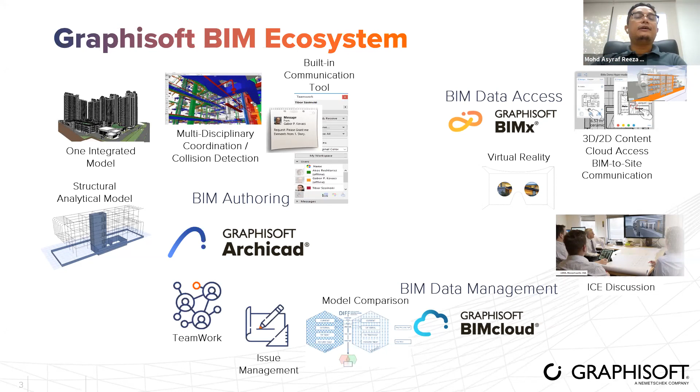And another one is BIMcloud, our digital platform that facilitates BIM data flow among our system. I will talk specifically about BIMcloud later, and we will touch on other platforms in the ecosystem too.

So the idea is this circulation will be shared with each other between these 3 platforms: ArchiCAD, BIMX, and BIMCloud. It can be a 2-way communication, not only 1 way. I will give a brief about the details later.

Before that, I want to brief a little bit about BIMCloud. So what is BIMCloud? BIMCloud is secure real-time collaboration between project team members, regardless of the size or complexity of the project, the location of the office, or the speed of the internet connection. It's available on both private and public cloud configuration on standard hardware, meaning even a smaller office can take advantage of fast, efficient, and secure access to the shared project in real time.

They also have what we call BIMCloud AAS, where everything, all the setting up, will be done by Graphisoft itself. So you no need to worry about maybe needing to hire IT guys, because Graphisoft will help you do all the setup for you already.

Inside the BIMCloud, first of all, the purpose of BIMCloud is mainly to share the ArchiCAD project to the cloud, so that later you can use it to communicate or send design changes, including data and classification, especially BIM data, to another ArchiCAD user. And it can be two-way communication. One user can send data to the BIMCloud, and another user can receive the data, and so on.

Later I want to talk about the integration. I will touch mainly on collaboration and coordination. So I want to play one of the videos here. Mainly from the BIM model, you will use it to discuss or collaborate with other people, maybe from another country or another office.

Through inter-country collaboration also by using the BIM platform, and all the data you have, you will use it to share to others and to show your design when you do the collaboration.

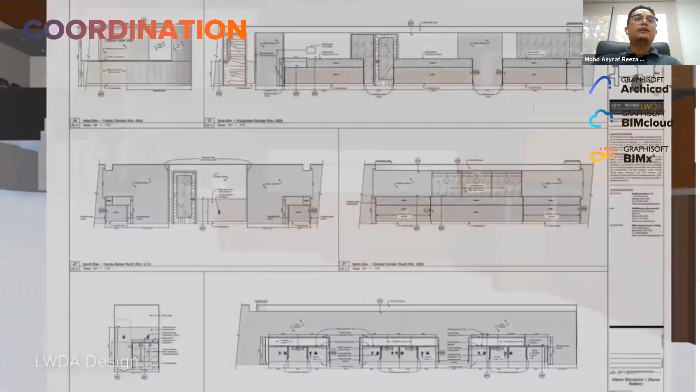Another aspect is coordination. After you have your BIM model, you will need to discuss with your client or your consultant. So here we must have a good platform to show or present your model nicely, making it easier to understand for the client and also for the consultant.

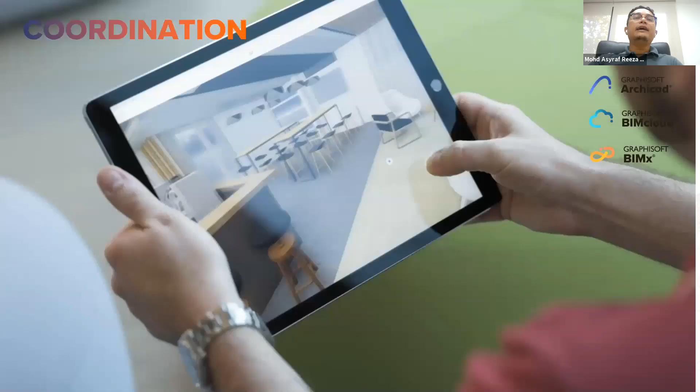From here you can use our system, BIMx. You can use a mobile platform like your phone or your iPad to do this in a very intuitive way. The idea is we want to make sure our team stays connected regardless of the situation.

Especially now, just last year we faced the COVID situation. Actually in Graphisoft we had this system long before COVID happened, so our clients or customers could assimilate with the situation. Especially during COVID, they had this system so they could still work from home, even when government regulations required decreasing office occupancy by 40%. With this system, our colleagues can still work from home in real time on their projects.

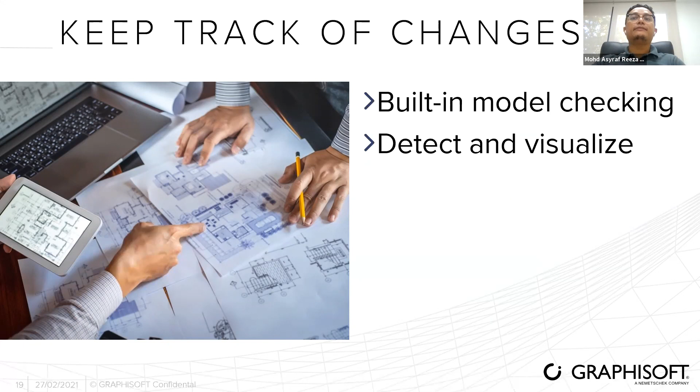This built-in model checking workflow guarantees high quality design and saves you time and money, because you no longer need to do repetitive work. Everybody synchronizes to always get the latest update version of your model or documentation, and can detect and visualize changes between models and revisions in a more intuitive way with real-time notifications. The idea is the user just uses the notification in ArchiCAD, sends it directly to another user so they can instantly get the comment and do the update of the model.

Another one is one for all and all for one. Open standard and workflows mean collaboration is guaranteed regardless of what software team members are using. So other consultants or members cannot give any excuse anymore, because this platform can run or accept almost all of the BIM tools that they have. They can just give the file and we can link it to the ArchiCAD file for collaboration and coordination, and use this Graphisoft solution to share model information between disciplines through BIMCloud and ArchiCAD that work together as a central hub for the building information model.

So you can enjoy complete access to all information during the design process without the need for additional IT solutions. In ArchiCAD, this BIMCloud also has stages, but we have a solution for companies that don't need to spend much on servers, because in BIMCloud SaaS we have a cloud platform you can use. We will set up everything for you, then you just run it on your ArchiCAD for coordination. Also in BIMCloud we have a snapshot backup system, so you can save time, avoid mistakes, and minimize the risk of data loss with this efficient project management built on a shared model hub.

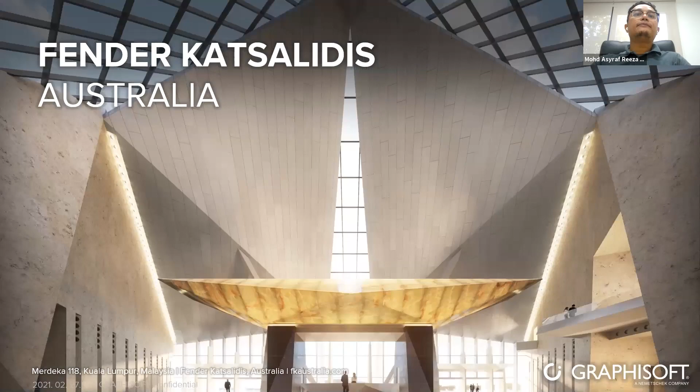So I want to give a teaser of Merdeka 118, the top of the building. Inside the podium of Merdeka 118, this is outside. They are our client, they're using ArchiCAD. So maybe I will play a simple short video before we end the session.

Okay, can you hear? No, no. Okay, so... Fender Katsalidis is the design of Merdeka 118. Maybe I can just try to skip it. I'm not sure why I cannot hear it, it's very soft.

The idea is, even though the HQ is in Australia, the project is in Malaysia, so they can still keep continuing to update, discuss, or collaborate with their team in Malaysia through this BIMCloud system. You can imagine with this huge building, the second tallest in the world, it will help you do your work better, easier, and with easier understanding in terms of collaboration and coordination.

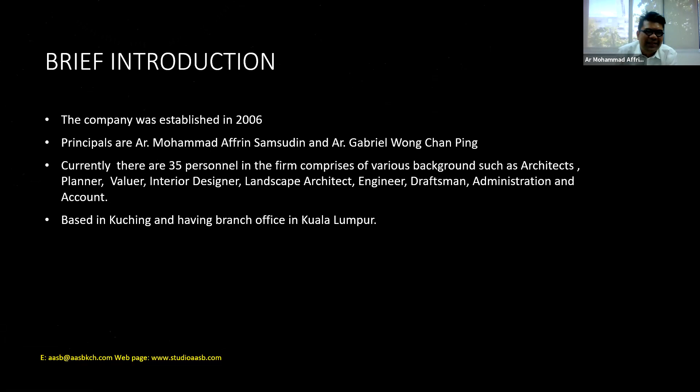The firm established in 2006. This is a snapshot of our staff, multiracial and mostly based in Kuching. I'm going into BIMCloud, sharing of experience, a practitioner perspective.

A quote from Ray Dalio, a hedge fund manager: time is like a river that carries us forward into encounters with reality that require us to make decisions. We can't stop our movement down this river. We can't avoid these encounters. We can only approach them in the best possible way.

Past, present, and future. In the past, I came from the era which is at transition from using manual drafting and CAD drafting. It was not an alien tool for us back then to work with set square, T square, stenciling, DK style of writing, and we have this.

When we did perspective, we have to know how to use airbrush and all this watercolor. And guess what? Storage of drawings, drawers and hangers.

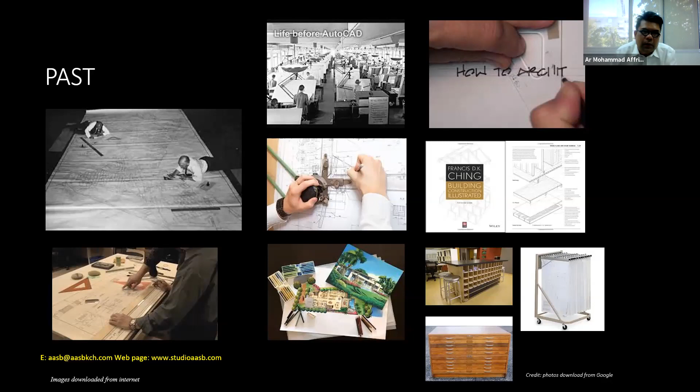In the firm now, currently, back in 2019 we were still doing models for our clients, and our staff were still trying to work based on CAD. They do express their frustration. There are times they have difficulty visualizing things in 3D, especially when the architects come to sketch and they say, what the hell did my boss sketch here?

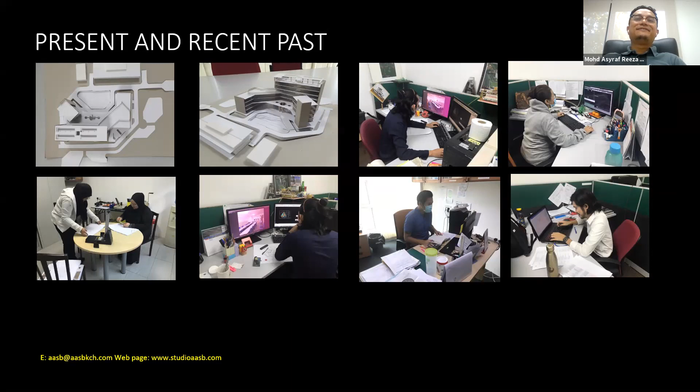Look at this transition of technology: storage by physical storage, then the era of floppy disk or diskette or external hard disk, then portable hard disk comes in, then the era of CD storage, eventually thumb drive and server.

In our office, we have a server, and that server has broken down twice in the 18-year lifetime of the company, and it's not cheap. It stores data up to 6 terabytes, and we keep our data for clients based on a statute of limitation of 7 years. And BIM software and BIM cloud moving forward for the future...

Most firms, I believe, will encounter a very similar situation. There is a generation gap in the firm, and we do notice shortcomings regarding 3D visualization, as well as cultural differences pertaining to work attitude. Some say strawberry generation, some say millennial, some say generation X.

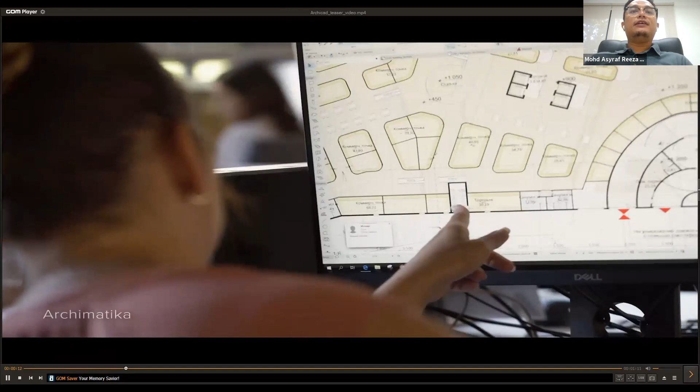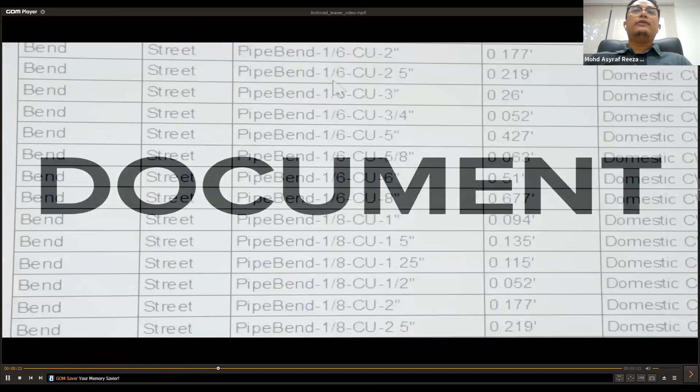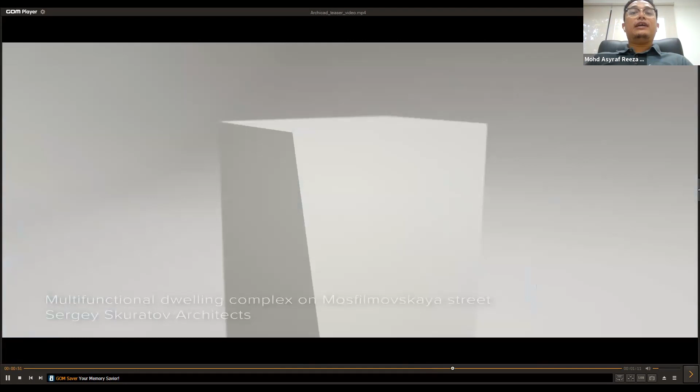So the idea is, in this system, not only do you want to show your design after you do your BIM model with all the data there - you can use BIMCloud and BIMx mobile presentation to present your model in a very intuitive and interactive way to your prospect or client. Using a mobile platform, either iPhone or iPad, you can even change your model to VR mode. So you can imagine for one platform they have a lot of things, it's a matter of digging out and trying to use all the functions that they have.

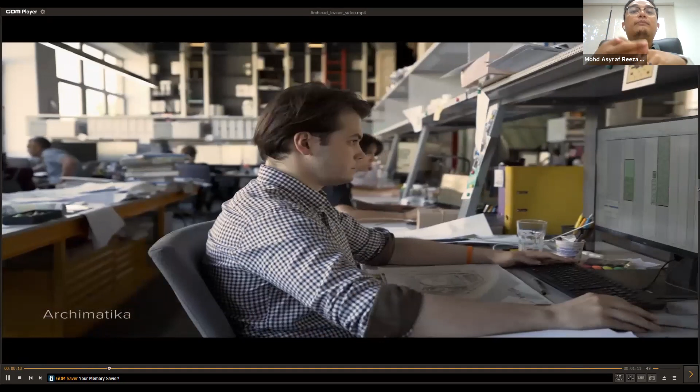That you can get, like I said, in one price, I can say. Of course they have additional options - if you want to get more, you need to add more, like BIMCloud SaaS. But overall, the basic BIMCloud is good enough, the basic solution. You need to have ArchiCAD, and automatically you get BIMx and BIMCloud Basic, plus we have Twinmotion. Maybe later you can highlight about Twinmotion also - previously this Twinmotion was similar to Lumion, you needed to pay about 8,000-9,000 to get that platform. Now it comes together free with one cost only.

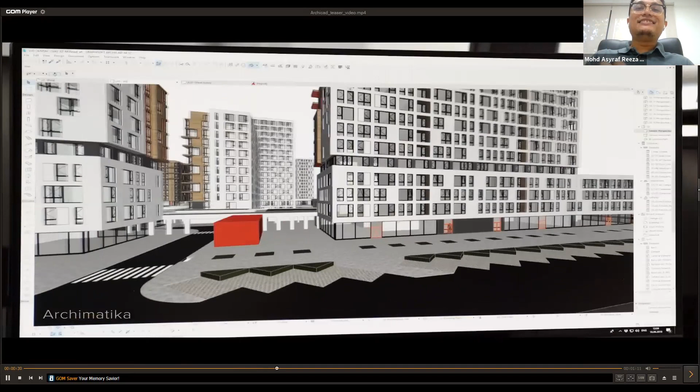Sorry, okay that's all, maybe I can stop here. Okay, maybe we have another question.

Yes, but the system is actually quite similar to the bank system. Like when you log into your bank, they have a specific username and password for you to log in, right? And now we even use Google Cloud base. This Google Cloud base is very secure. Until now, I think this is the most secure cloud in the world. That's why we use Google Cloud, and it's very established and very stable and easy to use.